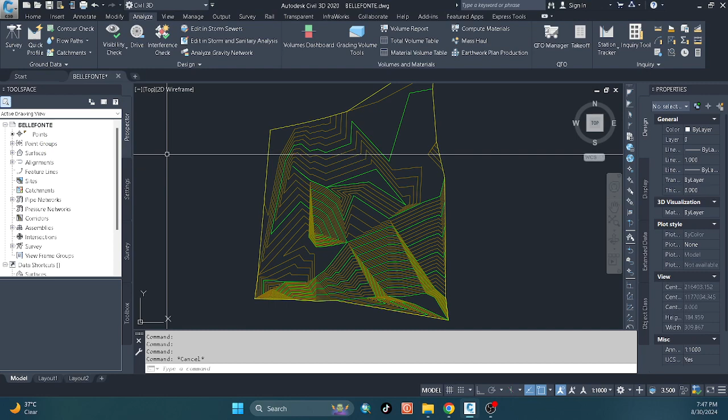There are a lot of different ways of alignment creation. But first, let's go with Home tab, alignment creation tools. Alignment name, let's say Bellefonte alignment. Center line, chainage 0. Propose.

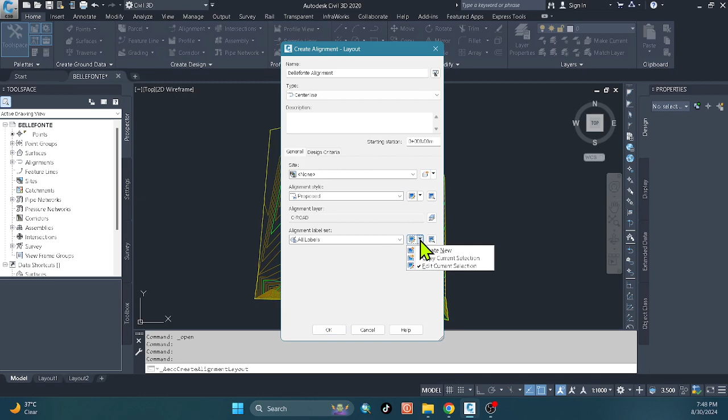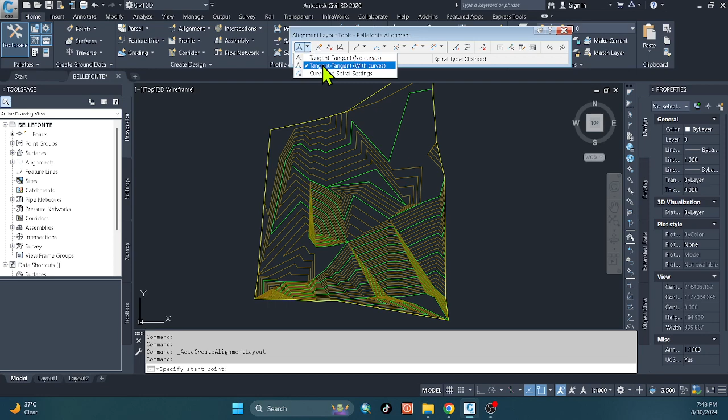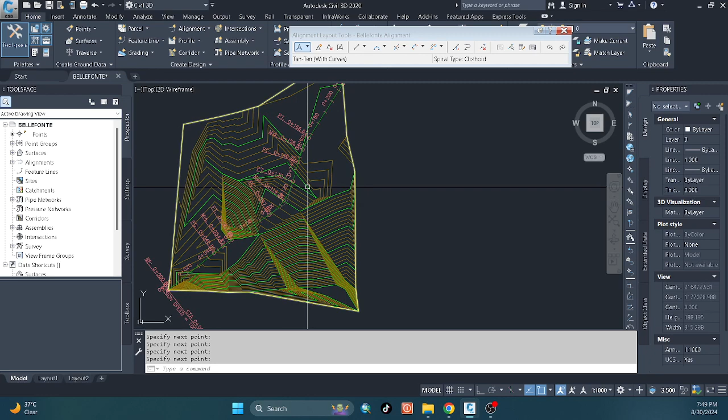Okay. This is alignment layout tools. We can use these three. This is just a sample. Let's use this tangent with curve. Let's start at this point. And now this is our center line for alignment. I will just close the surface for you to see clearly.

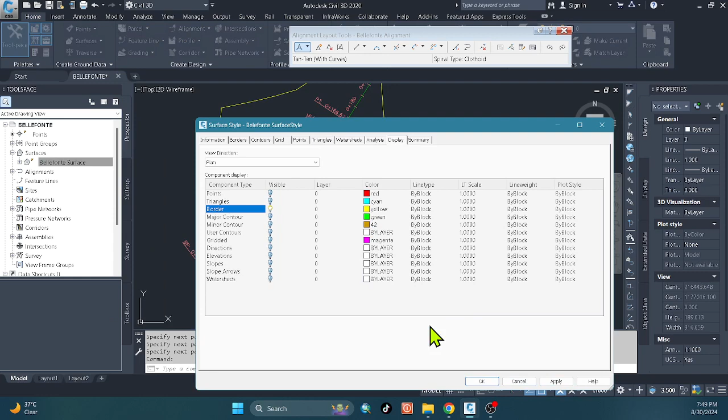So now we already have alignment, but I will show you the other tools for creating alignment. Actually, there's a lot, but whatever you use here, it's the same with this one. This one is just detailed, but I will show you some.

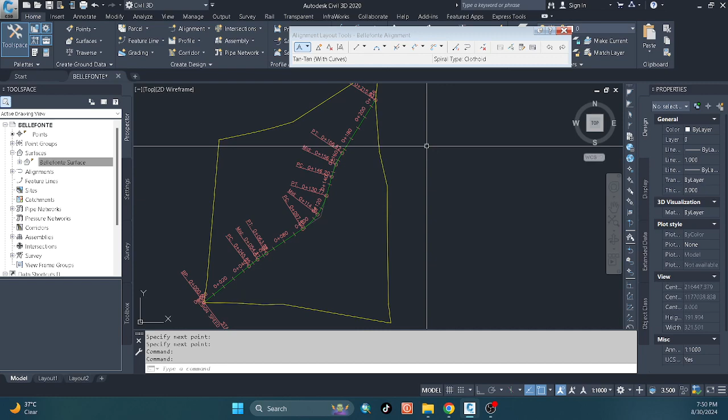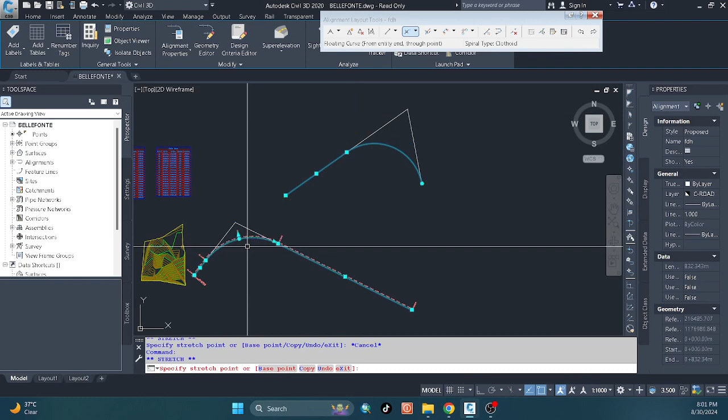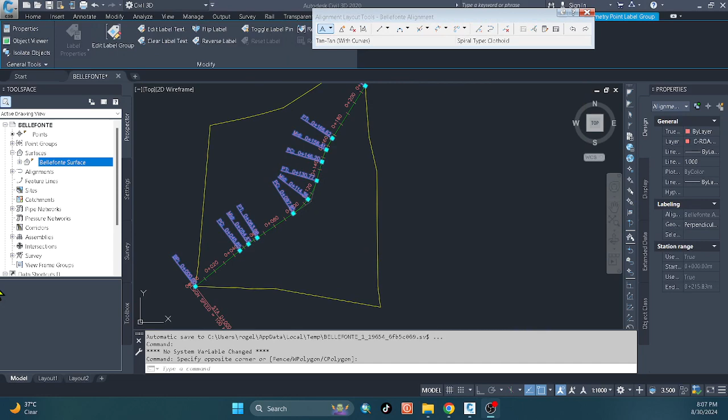Hello guys. You can explore this, but like what I've said, whatever option here is already in these three combined. You see the difference of these two alignments. Okay, let's go back to our file. I just showed you this. Let's go back to our file. Okay.

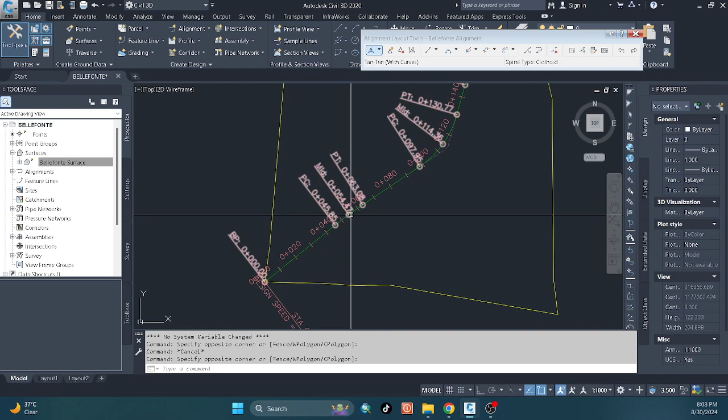By the way, when you close this alignment layout tools and you create another one, it's a different alignment name. That's why you should not close this until your alignment is finished. And for now, the labeling of the alignment: like what I've told before, whatever you make in your Civil 3D, you can see it in the Prospector tab.

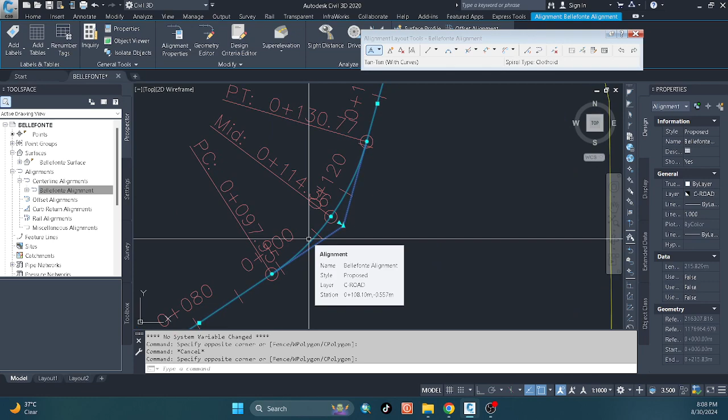Let's go to alignment, which is this one. This is the alignment that we created. If you select it, it will select the center line. This is the center line of the road. By the way, this tutorial is only for how Civil 3D works. But when it comes to technicality of the road radius and the slope of the road, that's for the design engineer. This tutorial is for Civil 3D only. The standard, the minimum radius for the curve, that's for the design engineer.

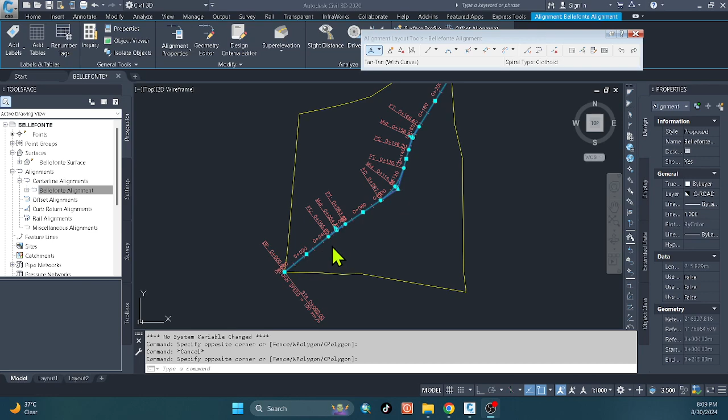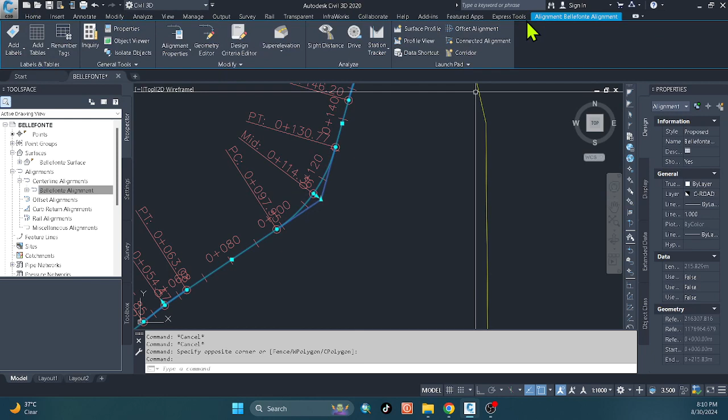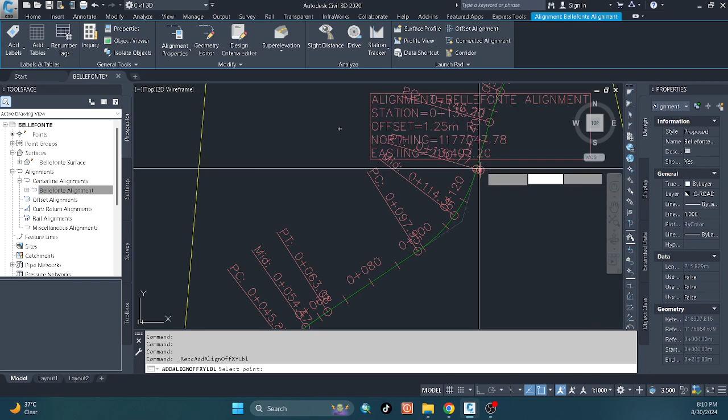Okay, since we already have alignment, let's close this. And then let's edit the labels of our alignment. Or you can also add labels here. Just click your alignment, and as you can see, our contextual tab shows the options regarding this alignment. So let's say add labels. For example, we add labels here. You can add labels and you have options here.

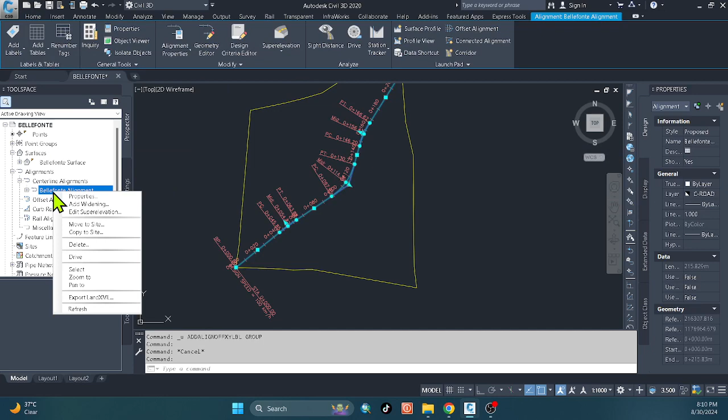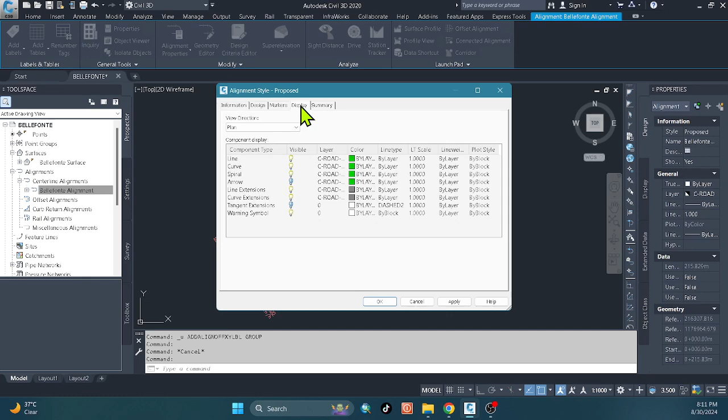So for now, let's edit the label. Select your alignment, or go to your Prospector tab, right click, and then properties. This is the same with other entities like surface; this is the way of editing your labels. Okay, let's edit the labels. For example, this. Just click the entity and then right click. Edit alignment labels.

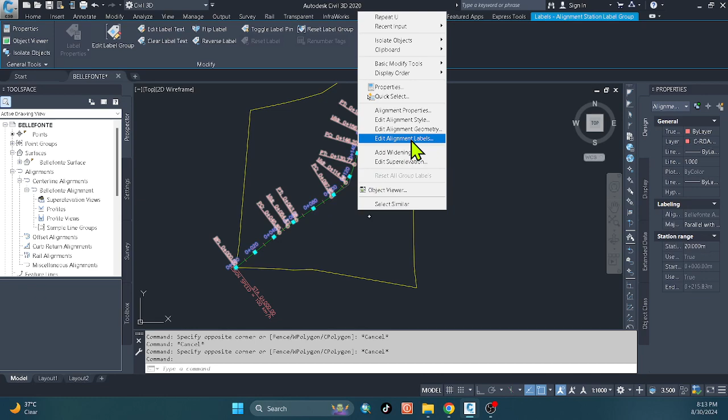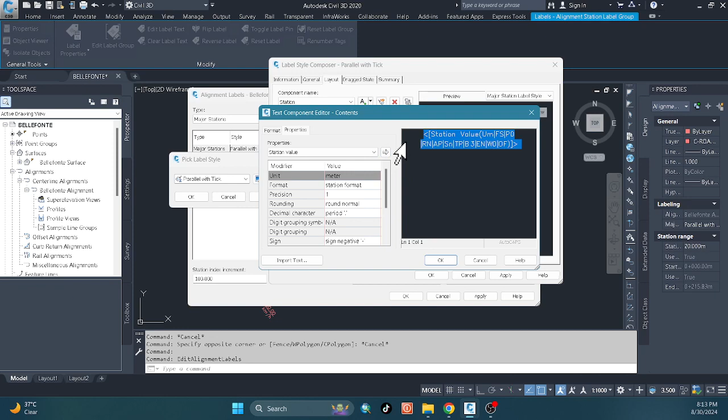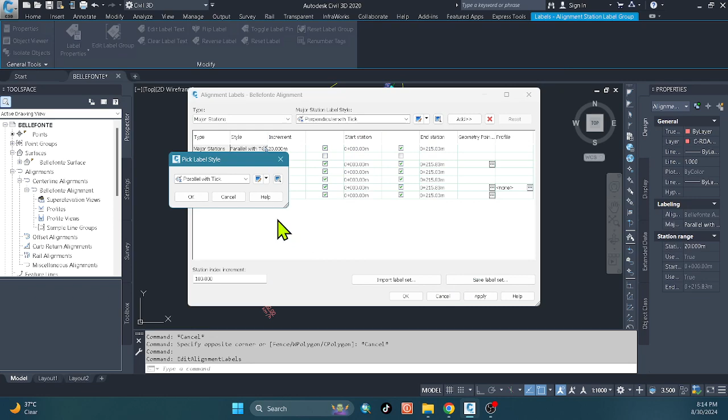Actually, you have a guide here. There is a preview, so you can follow the changes you made. And when you're editing, always highlight or click this and then go to format. For example, you want to change the text or the color, or change the height if you want. So you see the change. Whatever you want to edit, just click and always right click, and then edit alignment labels.

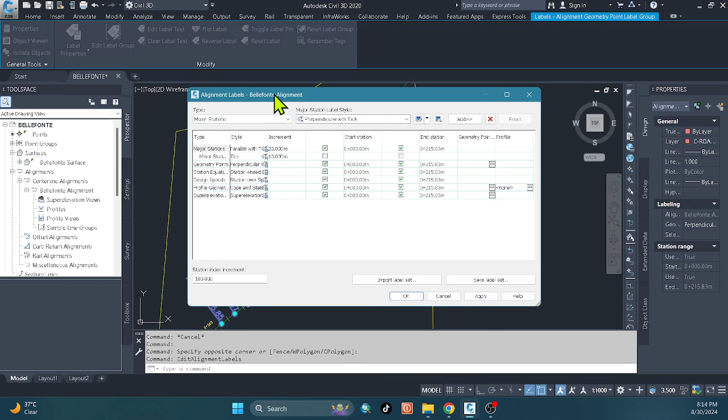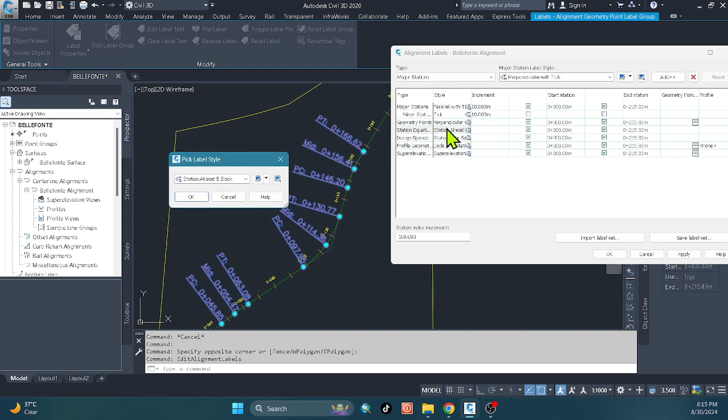For example, this, same. When the dialog box shows, just click the style you want to edit. Actually, not this station equation. Let's try this. All you can do here is trial and error because there's a lot. As long as you know the concept, you know what is used. If you are not familiar with the names of all of these, you can do trial and error. Like for example, this, same procedure.

Highlight. Okay. Design speed. There's no other way. For editing labels, you do it one by one. It depends on the name category.

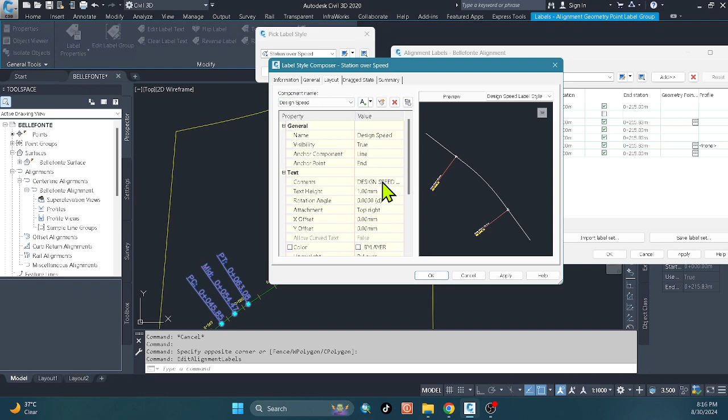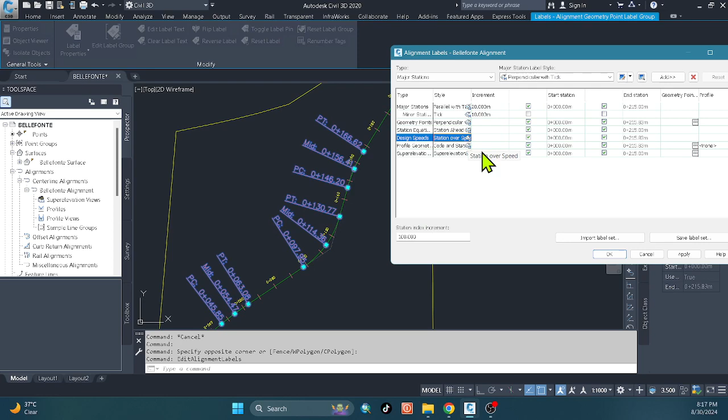By the way, there is an option also here. When I make the station yellow, only the station will change. And then let's go to design speed. Okay, let's apply it. And you can see the design speed will change.

Let's say this is too far from the alignment. Let's change the offset. Actually, the procedure is the same. All you have to do is just repeat again and again whatever changes regarding editing labels.

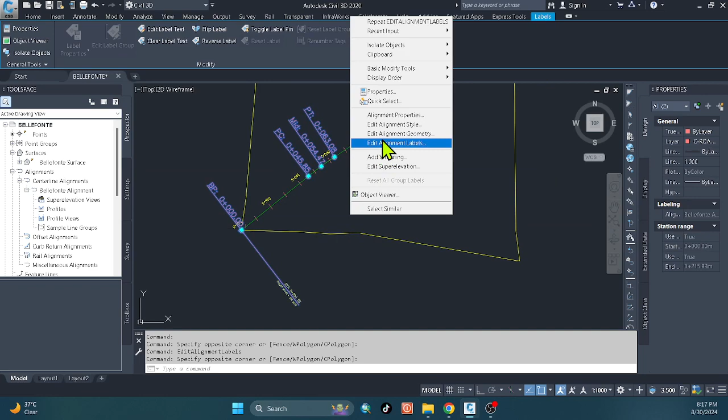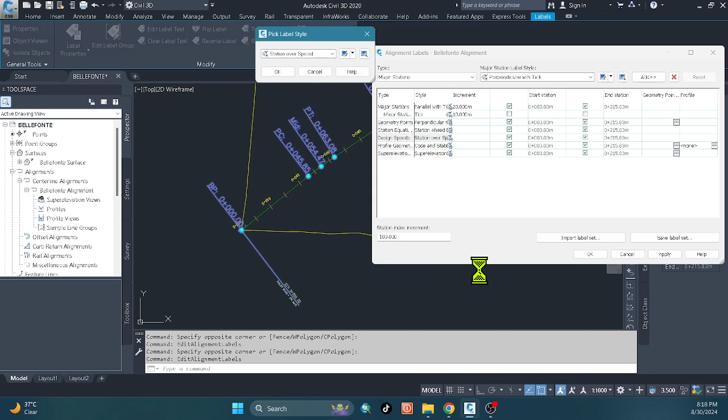For example, you don't want to show this design speed. In General, there is True and False. Select it, if you don't want to show this, just choose false. Okay. So you can see it's not visible now, but we need that one. So let's show it again.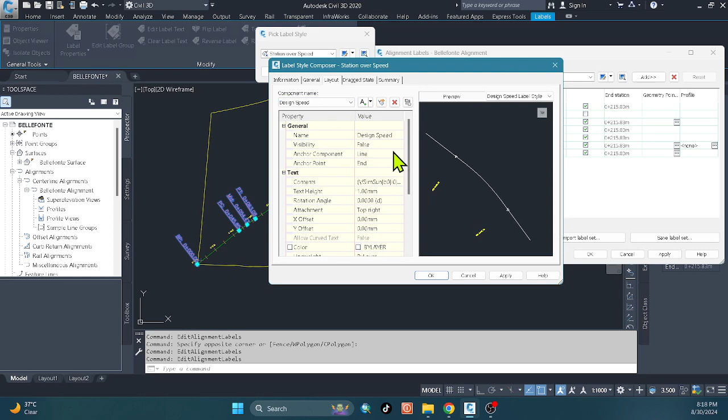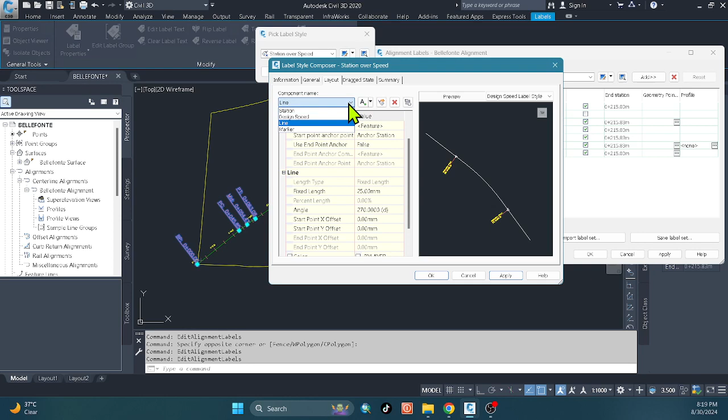If the line is too far from your alignment, you can change the length here. As long as you already know the procedure how to edit it, you can just read and then change it. Whatever changes you can see, you can follow in the preview. Okay, now it looks good, so apply it. And then let's change this also, same.

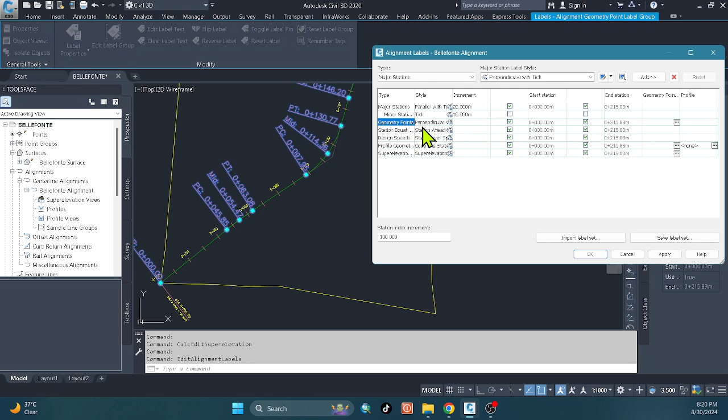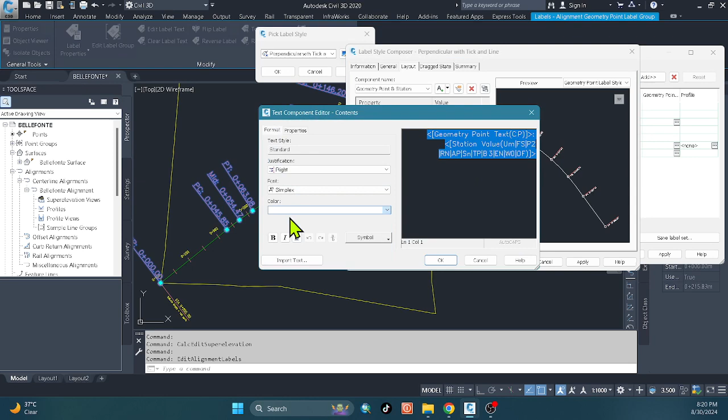Let's say geometry points. Okay, let's say 1.5, and then line, let's change the line like 20. Okay, you can follow, guys, right, how to edit the labels.

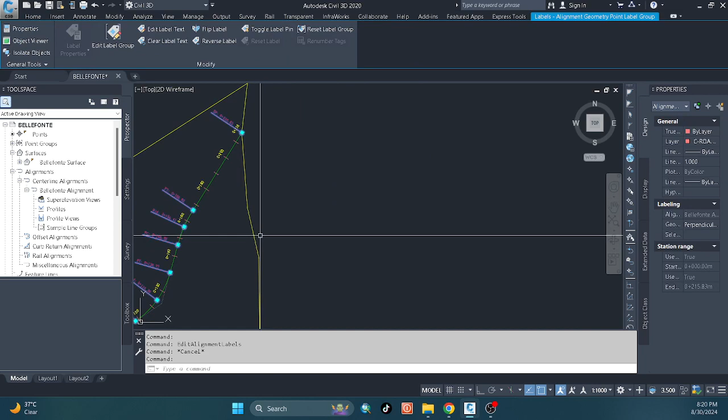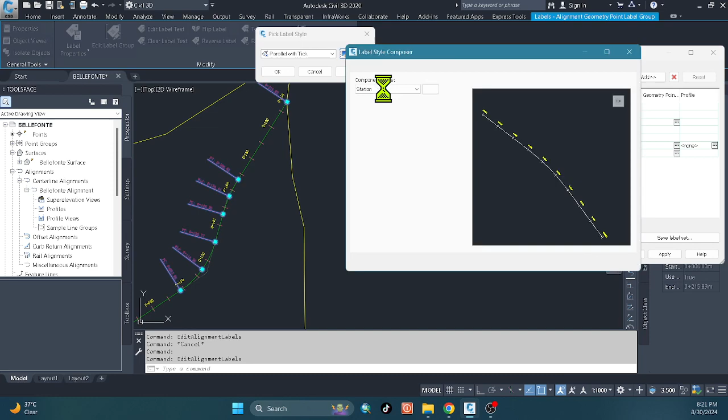Just click the labels you want to edit, right click and then Edit Alignment Labels, and then the dialog box will show, and then under style you can click it here, and then this option, Edit Current Selection, and then another dialog box will appear, and you can just explore this one as long as you have the preview. And in this dialog box there is also an option here, station or the tick. The tick is this small line here for the exact station.

Just edit it. For example, if you want to change the station, go to text and then highlight this and then format, then it's up to you what text or what color you use, and then after that okay. And one more thing, you may want to show not only the station in your drawing.

For example, you want to show the northings, there is an option here under properties. You want to show northings, and then in the preview click enter and click this arrow, and then again, let's change the color of this, let's say blue.

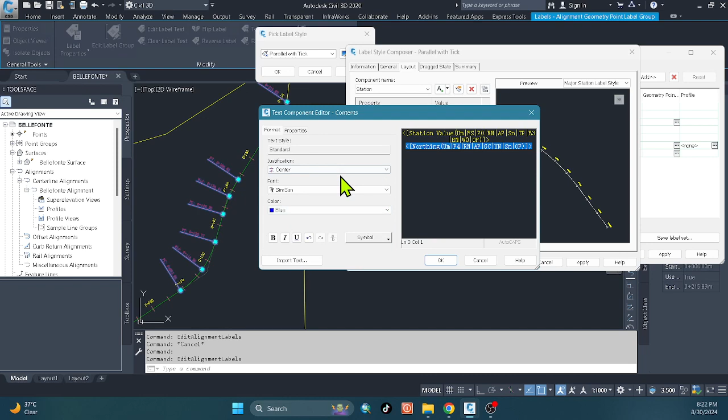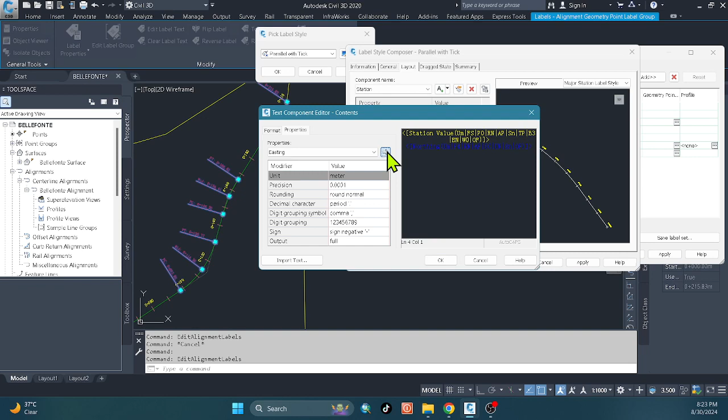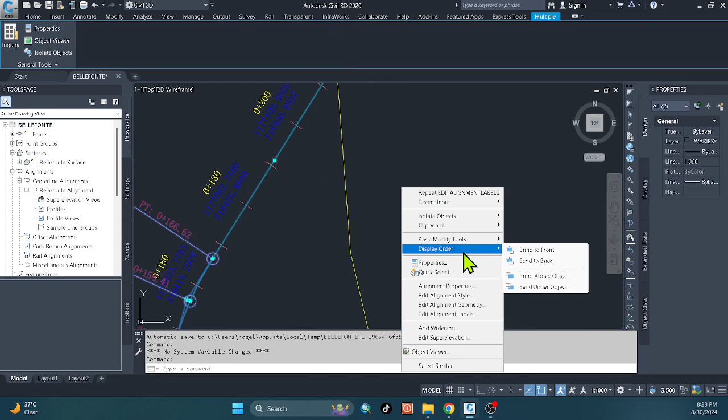Since we have a northing, we need also easting. But don't forget, if you make an additional one, your cursor should always be at the bottom, and then click this arrow, okay, apply, okay, and then apply, okay. So see in your alignment, not only the station will show, also the coordinates. But normally we don't show the coordinates in this alignment. I will just remove that one. I just show you what more you can do in the alignment labeling.

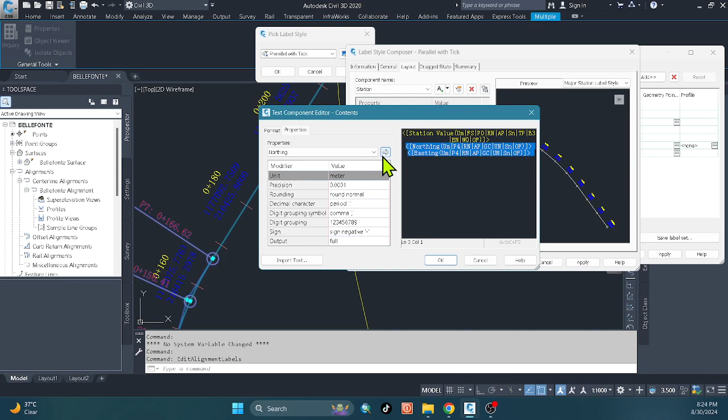How to delete that? Let's go here. Go to your northing and easting. Just delete using your keyboard. Okay. Now we already have the alignment.

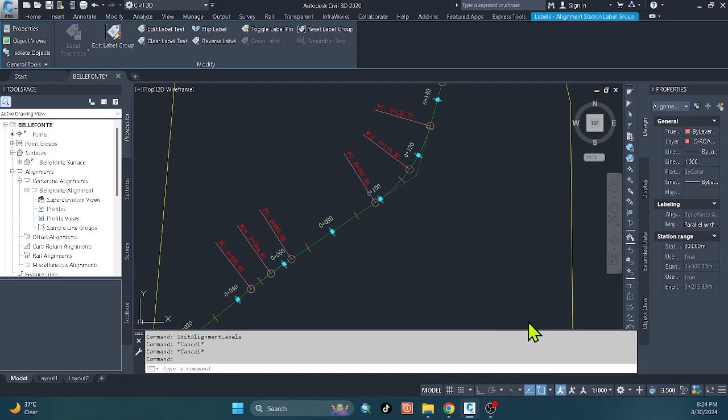To review again, because label editing is confusing: click whatever you want to edit, style, and then click the under style menu. All you have to do is just explore. For example, the station, design, line, marker. For example, your line, you want to change the color of the line, or you don't want to show it. Or let's say magenta.

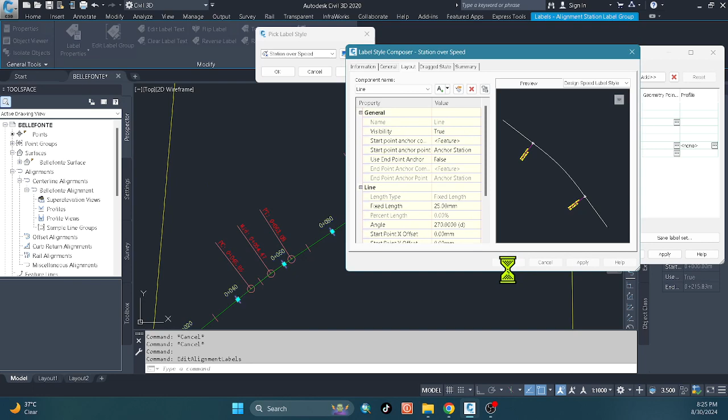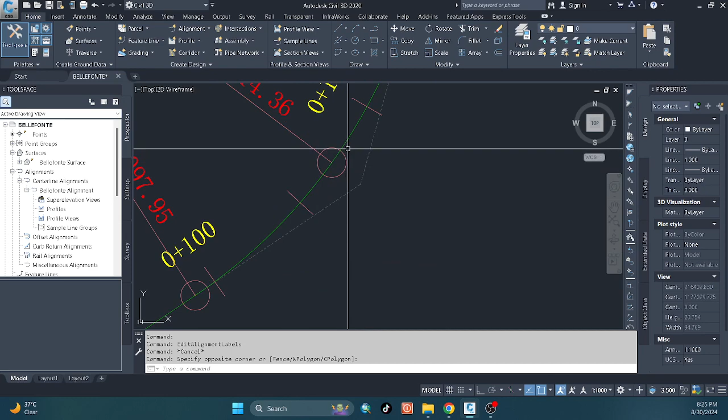Okay, since we already have the alignment, I will make a profile for this alignment. But this profile is only a surface profile. This is not a design road profile, only a surface profile. So let's go to Home, surface, and then create.